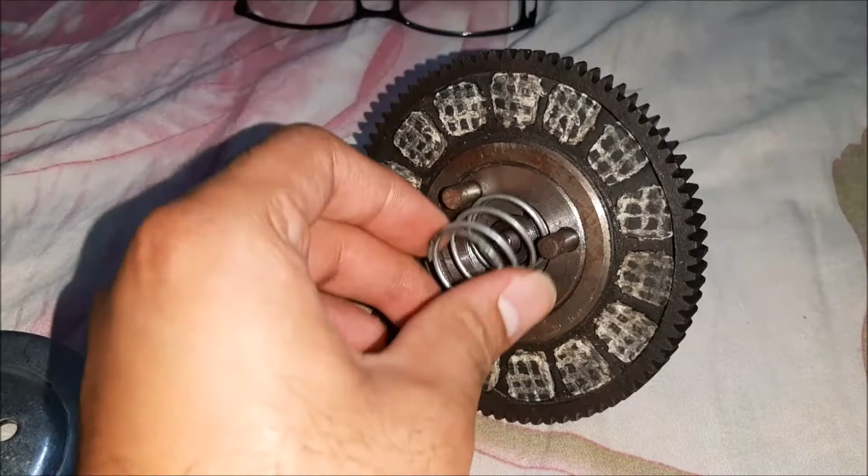So basically what we will do is the spring will go here. Spring will actually go there. And then the clutch base will be mounted onto this.

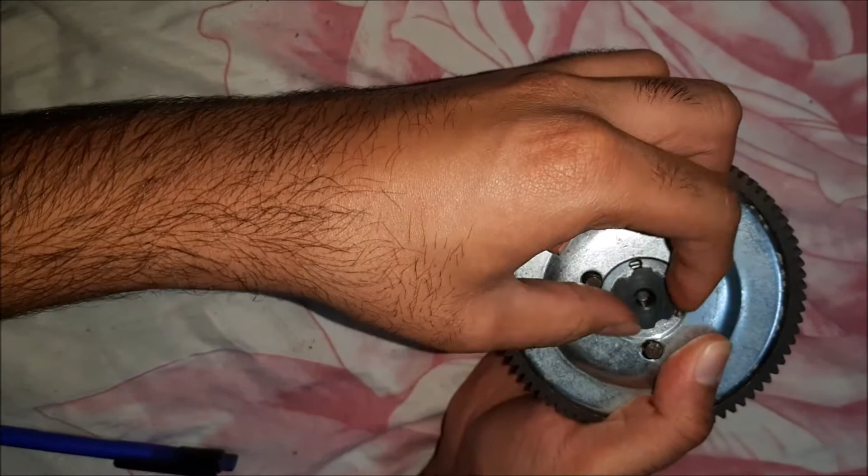So this is where the flower nut will be screwed on. So the spring will go here, and then I'll be having the friction plate which will go up there. So then the flower nut will go here, and the flower nut will be screwed onto that part.

You'll see the flower nut holds the system in place. So as I screw the flower nut, this will exert pressure on the friction plate, and the friction plate will exert force on the bevel gear.

So as you can clearly see here, there is no force. So if my motor turns, my friction plate will not turn. So as I continue to screw the flower nut, you'll see that when I turn the bevel gear, the friction plate will also turn, which will in turn turn my shaft. So a simple way to remember where the bevel gear will be, where the sprocket will be.

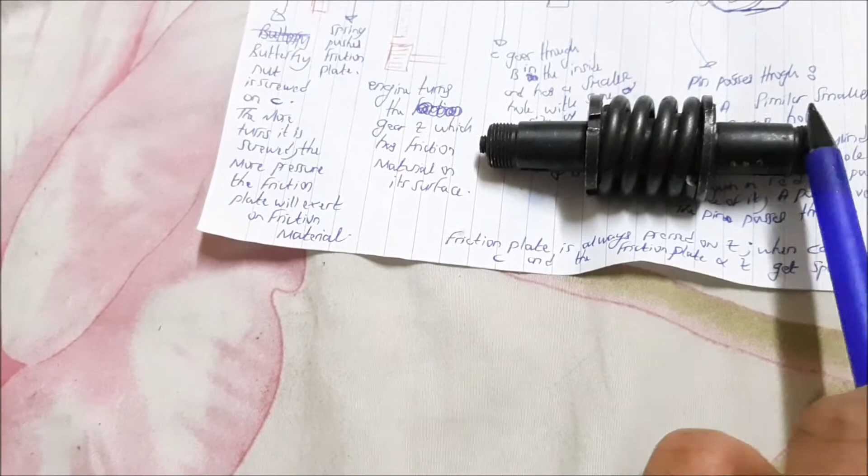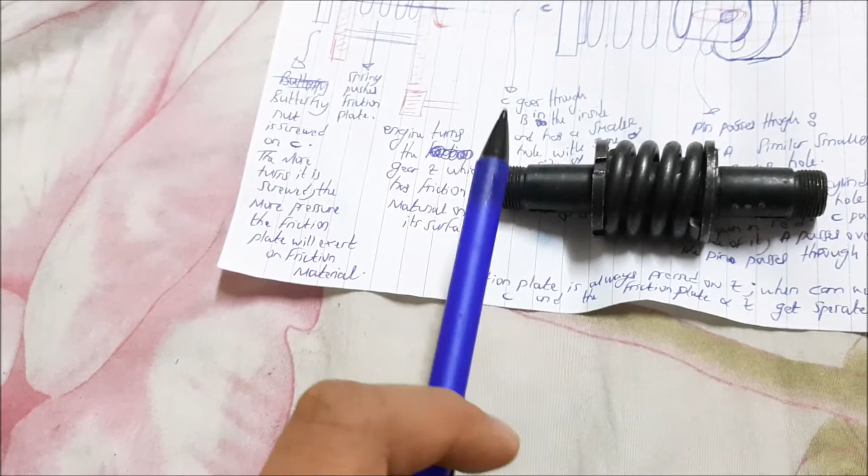So another way to remember this is a way to know where the bevel gear will be. So where the bevel gear will be, this is the place where there will be a flower nut. So as you can clearly see here, you have the protruding threaded end on this side. So where we have the protruding threaded end on this particular side, this is where the flower nut will be screwed on.

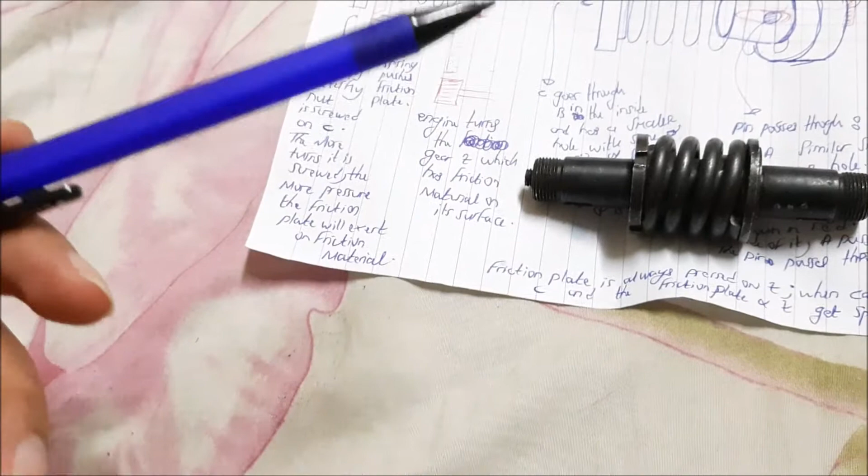So where the flower nut is, this is where the bevel gear will be. So we know where there is a hole, this is where the sprocket is. Where there is a protruding threaded part, this is where the bevel gear, which includes the clutch inner race, this is where they will be found.

So that's it. So another small thing we need to say is that, in fact, the problem is that the more I screw the butterfly nut onto that inner shaft, the more pressure the friction plate will exert on the bevel gear.

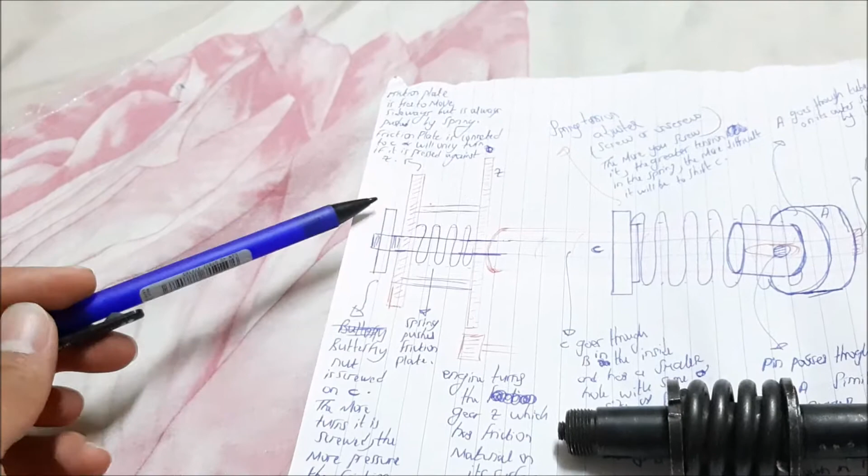But the thing is that if I screw the butterfly nut too much, even when the cam turns and shifts the inner shaft towards the left, the friction plate and the bevel gear will not be completely disengaged. There will still be force acting on the friction plate, so they will not disengage completely. So this is the problem that we can have.

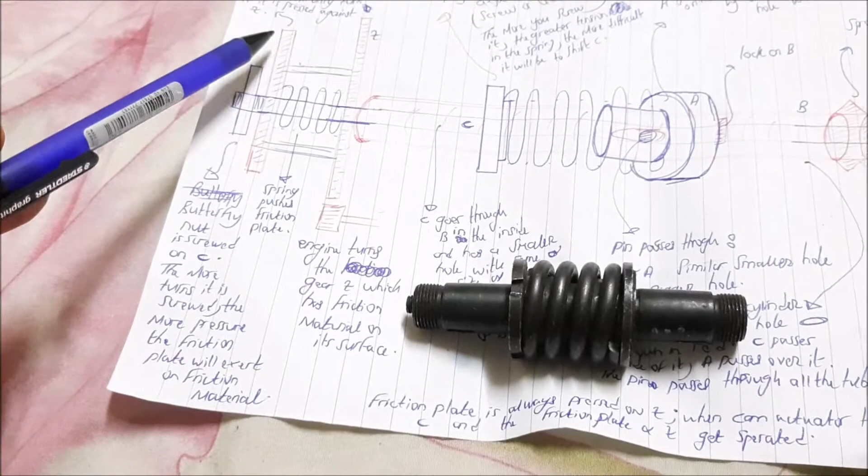It's like when we screw the butterfly nut too much, the thing is that even when we press on the clutch lever, you'll see that they don't disengage.

In another way, if you don't screw the butterfly nut in an appropriate way, there will never be sufficient pressure exerted on the friction plate that will cause it to press on the bevel gear.

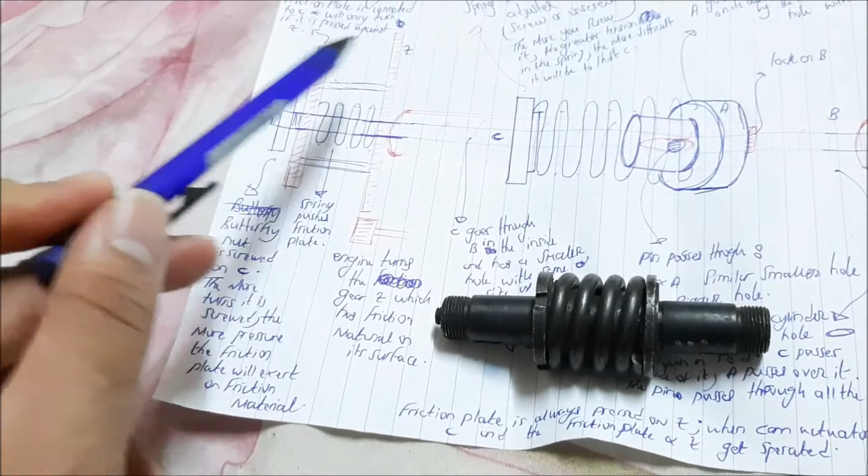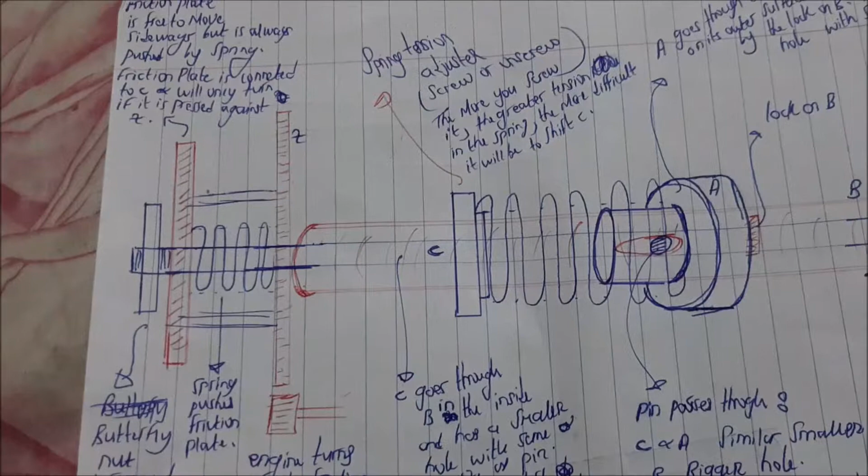So they will never be completely engaged, like firmly stuck together. So this is how you'll see that even when you're not pressing the clutch, the main shaft is not turning. So those are the two main problems.

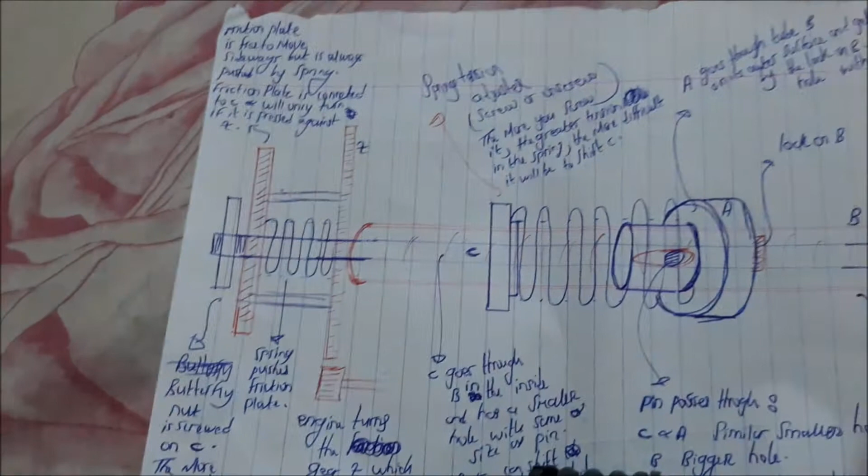So I'm going to repeat it again. If you screw that too much, even when you press the clutch lever, they will not disengage. So what problem we can have is, like, you might be riding your bike and your engine is on, so even when you press the lever, this does not disengage the motor.

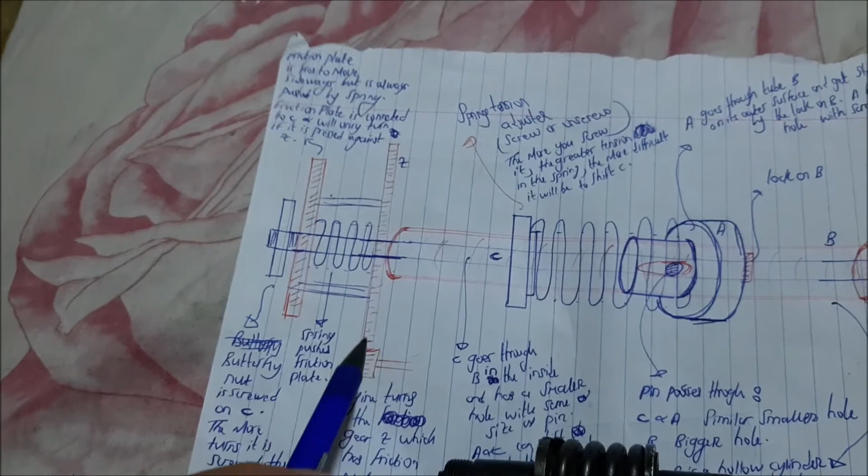Your engine will continue to turn the bevel wheel, which will continue to turn this friction plate as they're pressed together, which will continue to turn the main shaft, which will continue to turn your wheel. So it's like the clutch lever has no effect. Even when the clutch lever is pressed on, you can actually accelerate your bicycle and it will go fast.

Another example is when they are not properly engaged, like this has not been screwed properly. You'll see that even when the lever is not pressed, and even when you're accelerating hard, the engine is turning very quickly, but they are not properly engaged. So the friction plate will not turn, this will not turn your shaft, which will not turn your wheel. So those are the two problems.

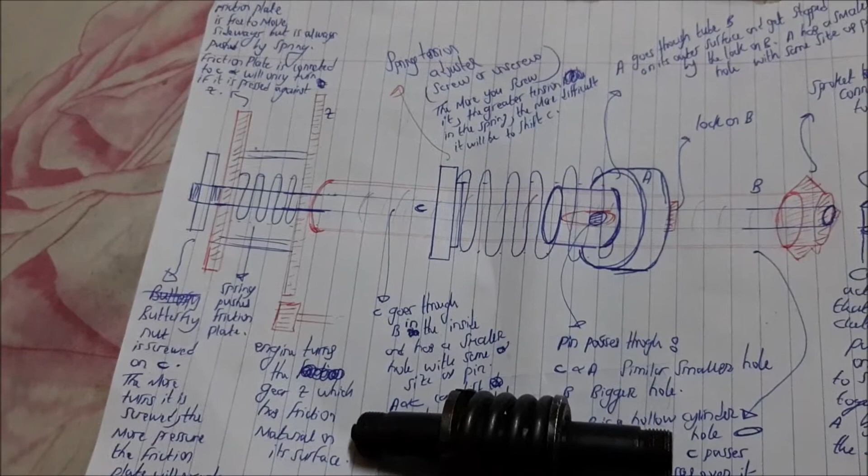So you need to find the right balance. We can test this - you need to find the right balance so that when I press on the lever, it disengages well, with no slipping. And also when I release the clutch lever, there is a good grip when I accelerate, the friction is completely stuck together, there is no slipping.

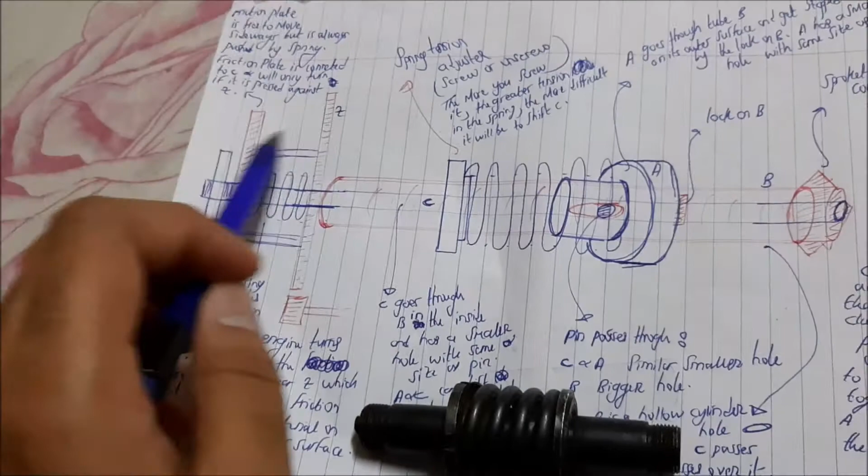So before showing you the actual installation and removal, we'll be going quickly through the different parts of the clutch assembly.

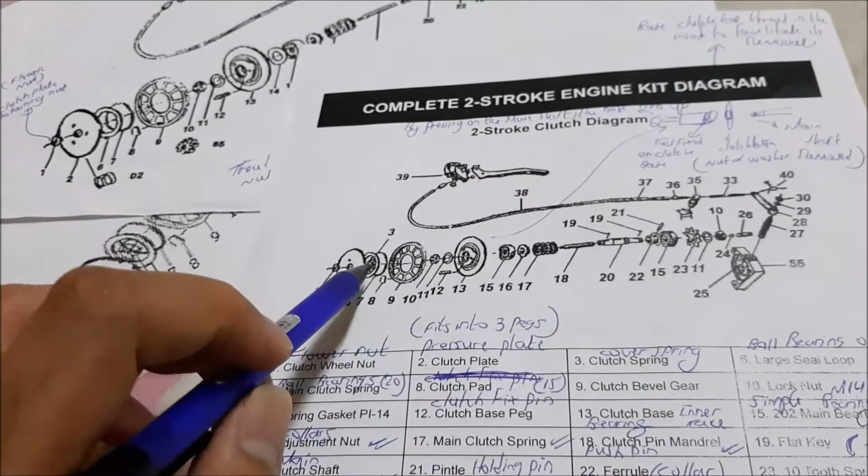This is the clutch wheel nut or the clutch flower nut, as we already said. This is the clutch plate, the clutch friction plate. As I told you, there will be a spring that will be pressing on the clutch friction plate. So when I pressed on the inner shaft, this will lift up, then there will be a small spring that will be pressing onto the friction plate to lift it up.

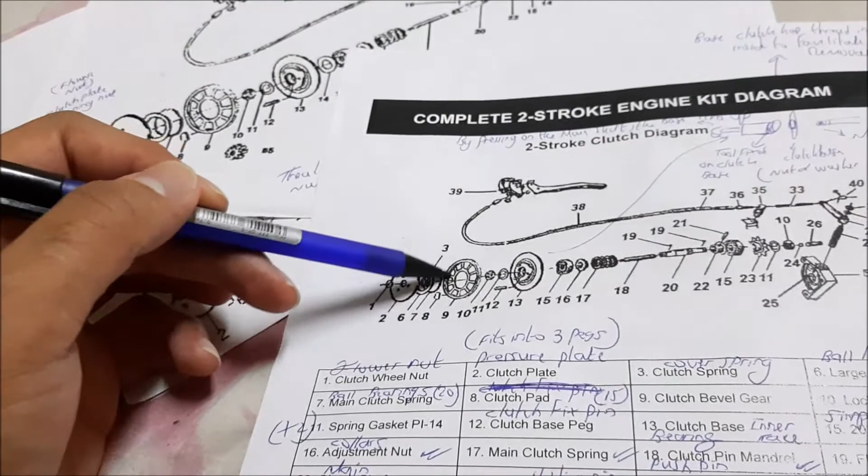Number 3, that's the cover spring. Then I'll be having the assembly of the bevel gear and the clutch in the base. That's the clutch, that's the bevel gear, that's the clutch in a base. And I'll be having the outer race and bearings. That's the inner race. Let's go through it.

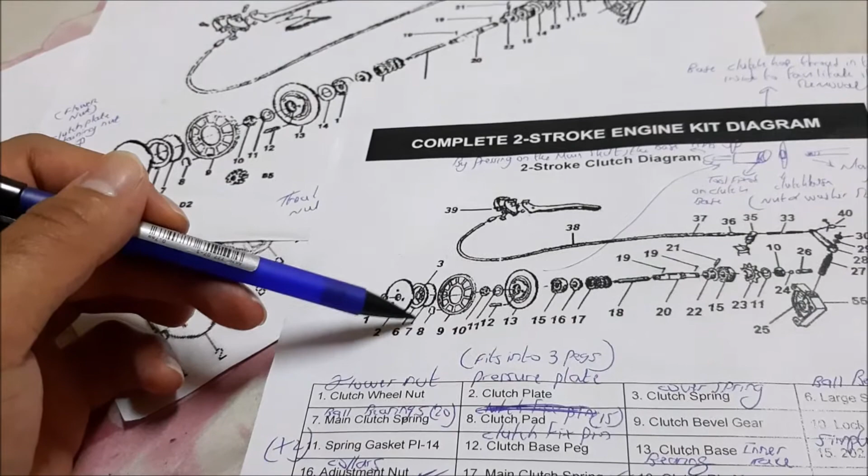Number 6, that's the large seal loop or the outer race. It will fit into that. Number 7, you'll be having the main clutch spring. Those are the ball bearings. This will fit into this, the ball bearings into this.

Then you'll be having number 9, number 8 are clutch pads. As you can clearly see here, those are clutch pads, friction material. Number 9, that's the clutch bevel gear. And as told you here, this will be fitted onto that. All of those are the same, are one piece. This will be fitted onto that.

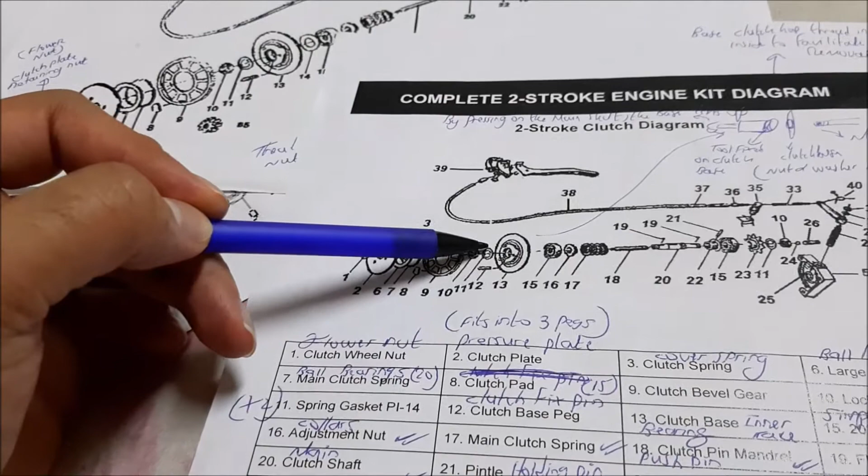I will be needing number 10, which is a lock nut accompanied with a spring gasket. Number 12 is the peg, the clutch base peg. Number 13 is the clutch base, the clutch base or inner bearing race. Then I'll be having 15, which is the main bearing. This bearing is fitted on the main shaft for support.

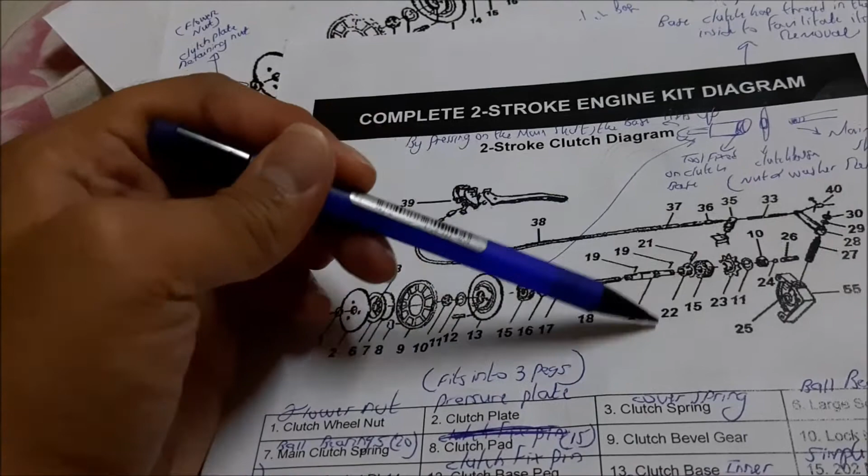As I told you, there will be 2 bearings - 15 here, this bearing, and 15 here. This bearing will be fitted on the main shaft for support. And then 16, as I told you, all of those - this one, this one, this one, this one, this one - all of those are the same piece, because the bearing goes over the main shaft.

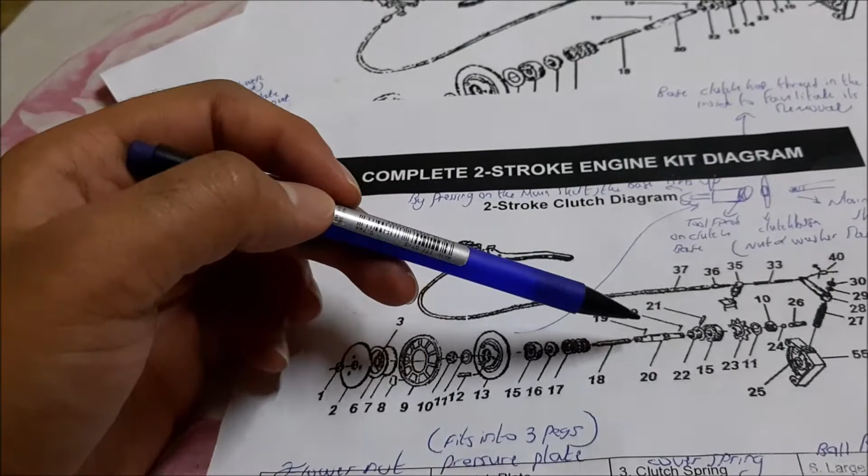Adjustment nut, main clutch spring. That's the clutch pin. That's the flat key, number 19 the flat key. Main clutch shaft, number 21 that's the pin. Number 22, that's the ferrule, the collar. And 15, that's the main bearing.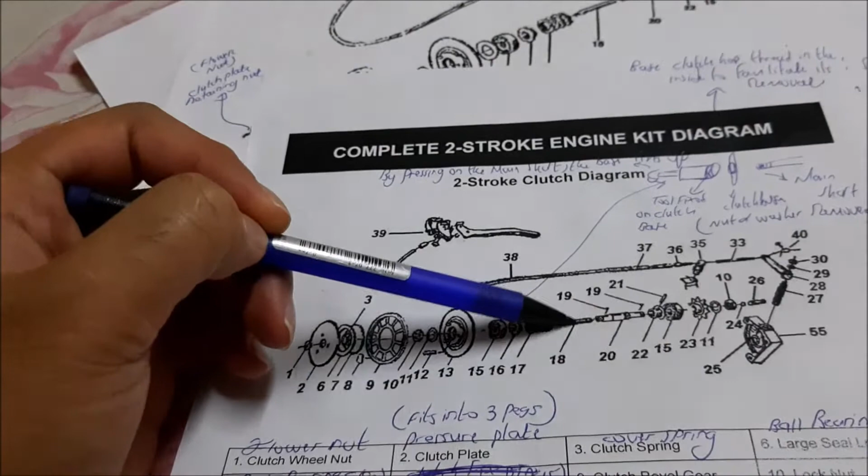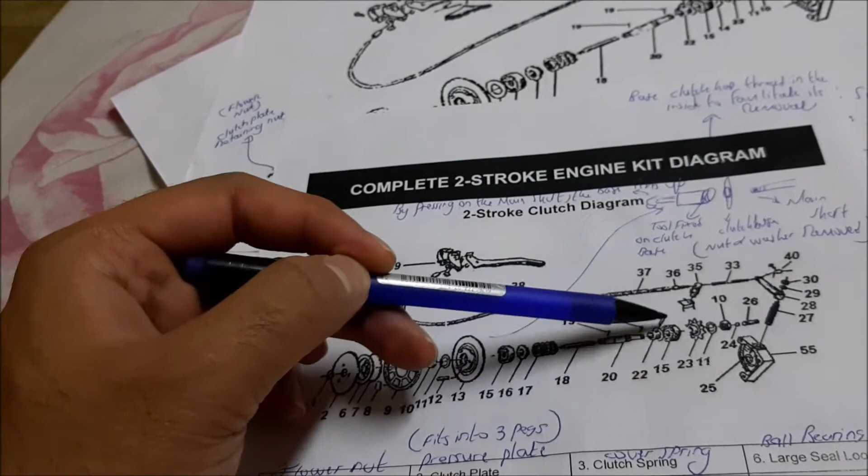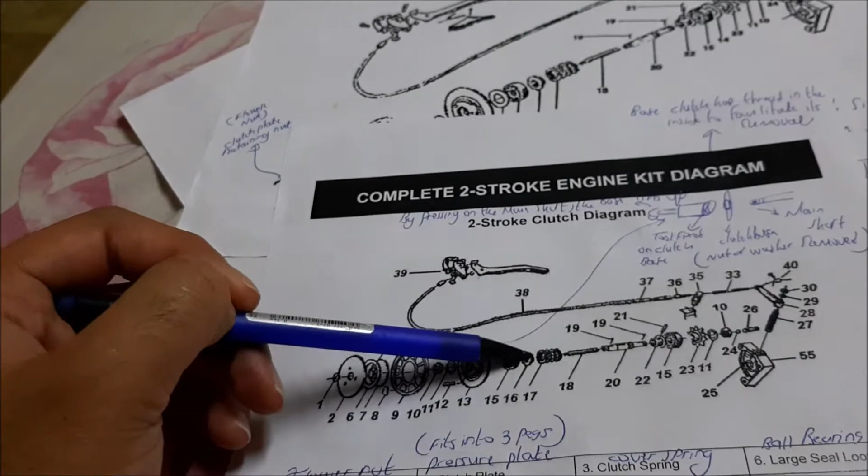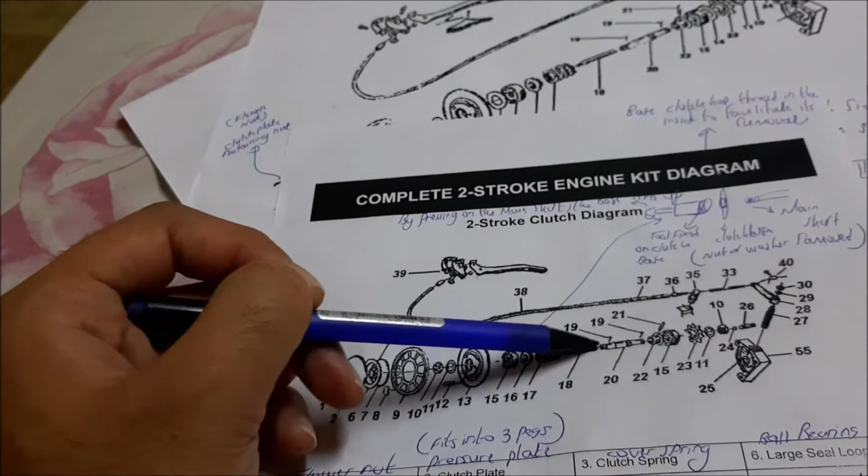As I told you here, we already know how this works. This inner shaft goes into this, and this collar goes over those two. When the inner shaft is into this, the collar goes over those two, and then this pin goes through all of those three - through the collar, through the main shaft, through the inner pin. Then I'll be having that spring which will press on that collar, and then I'll be having this collar or adjustment screw that I will use to compress that spring. As I turn the screw, this will exert a force on the spring, and the spring will exert a force on that collar, and this will shift the main shaft to the right.

And I already know that 23 is the tooth sprocket.

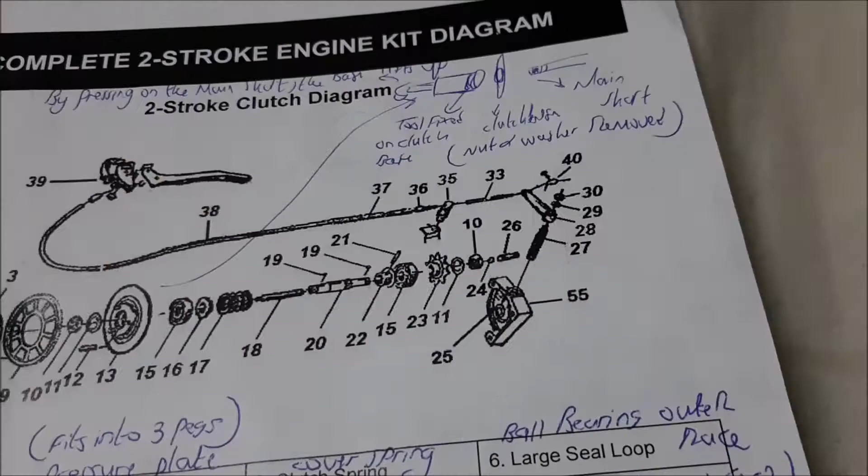So as I told you, similarly here, this is fixed onto that main shaft. So I will need a nut and spring gasket.

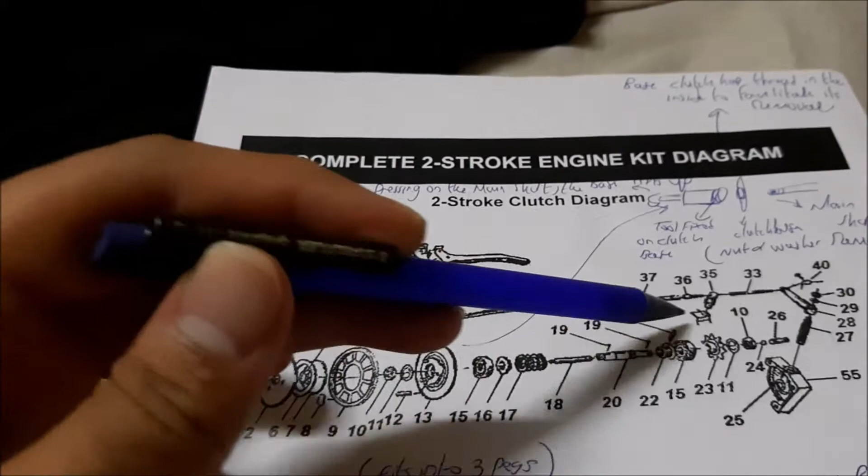Similarly here, as I told you, the sprocket is secured. The sprocket is locked onto that main shaft with the help of a flat key. And to be able to secure the sprocket on the main shaft, I will be needing the M14 nut.

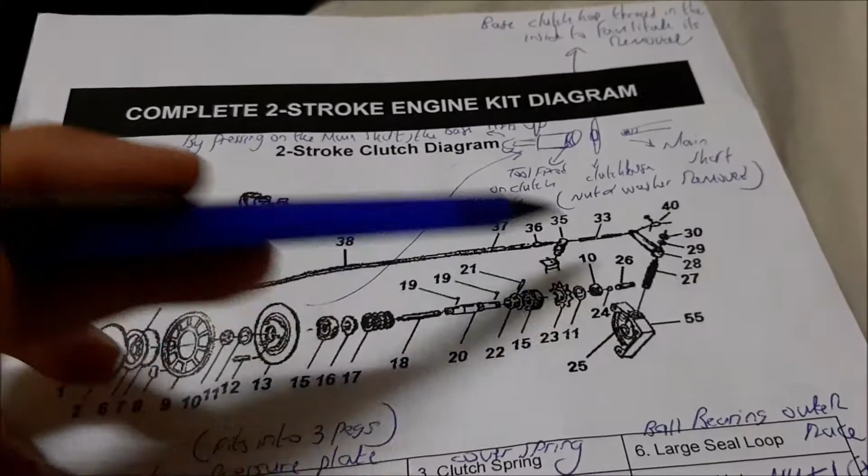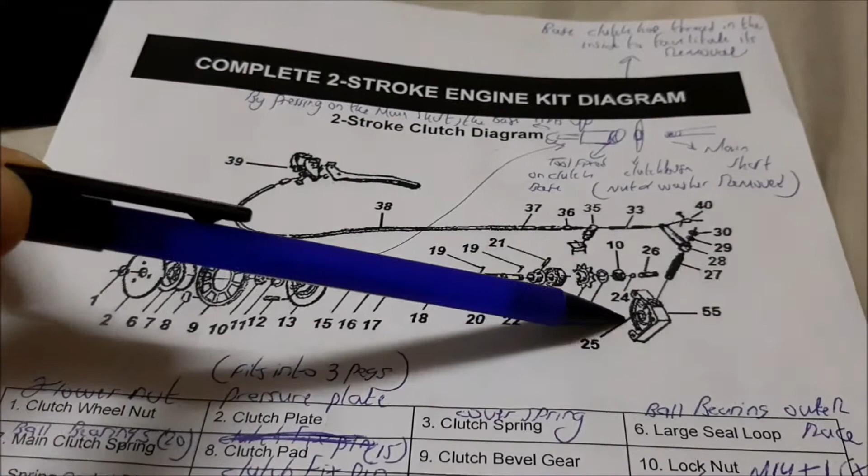Plus the spring gasket, and then 24, this will be the ball bearing or clutch actuator bearing. And 25 is within the lever actuation. So those, we don't care about those. That's the shaft fixed pin, so we don't care about this.

So 26, I'll tell you this is the pushing bar. I'll turn the camshaft, this will press on the ball bearing, which will press on the inner shaft, and so on and so forth. So those are the different parts.

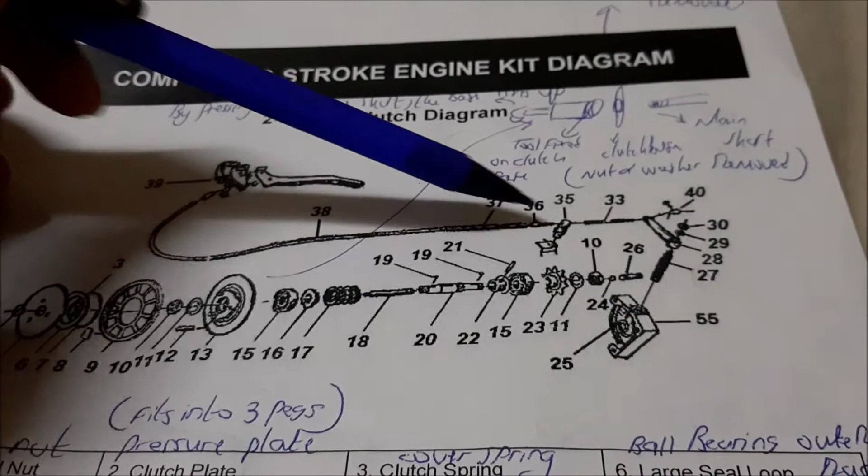I'll be having the camshaft that will enter here. So those are the lever actuator and so on. For example here, this is clutch screw base. I'll be having like heat shield spring and so on, clutch cable, this is clutch lever and so on. So those are the simple stuffs.

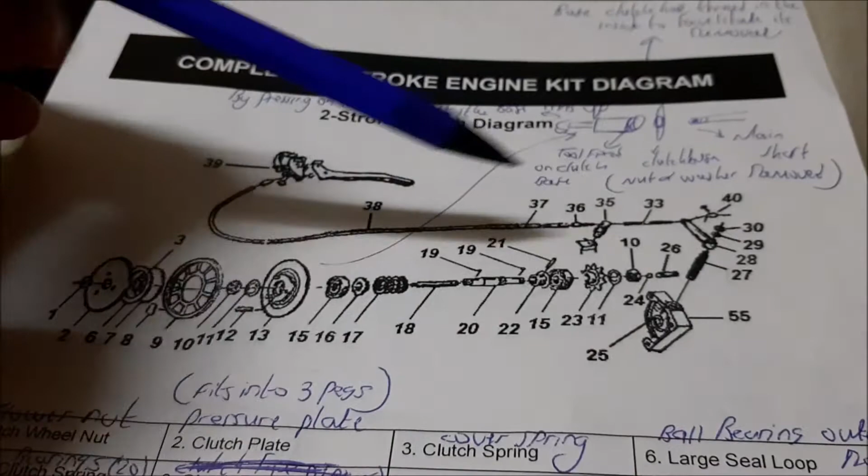But here it is, so that's all that we have. And that's a complete two-stroke engine kit diagram, the clutch diagram in fact. So that's it.

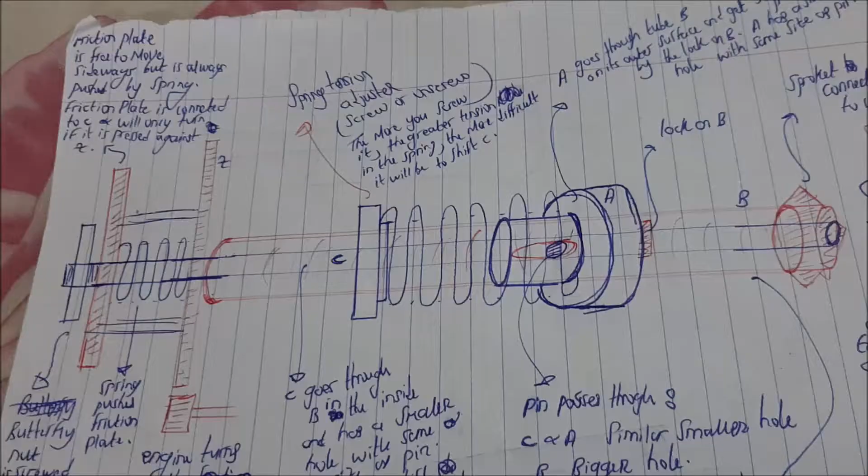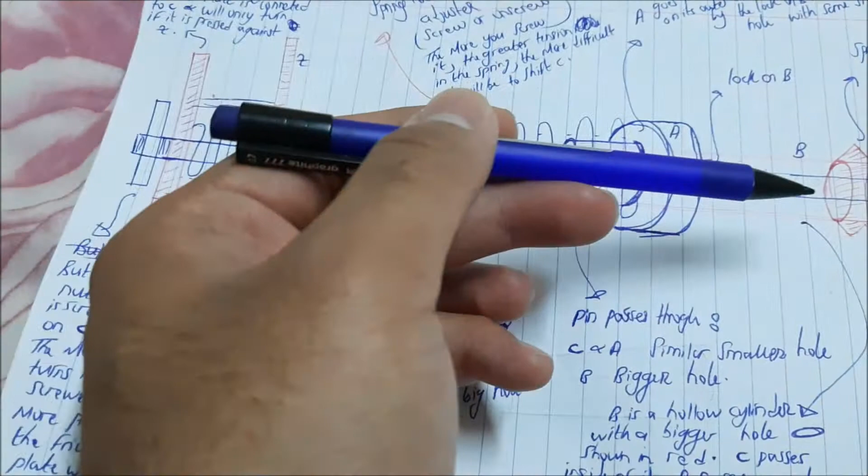So I'm gonna explain a small thing before we proceed to the removal and installation of the clutch assembly. We need to bear in mind that this spring is actually exerting force on the inner shaft in this direction, constantly applying a force on the inner shaft.

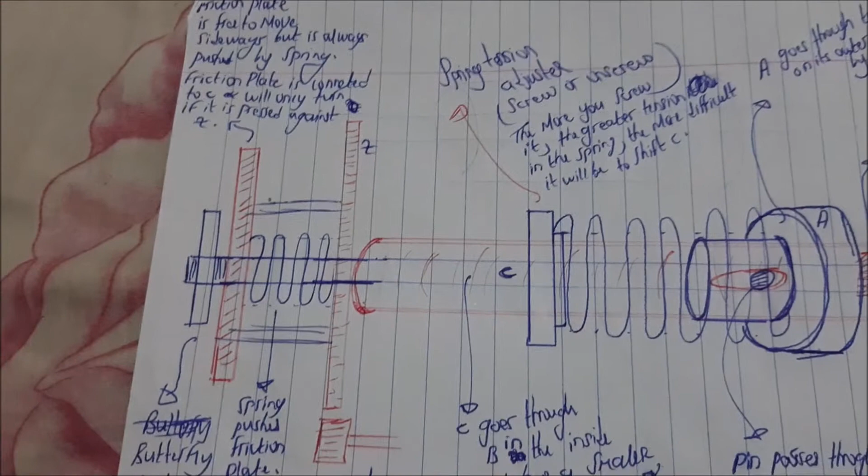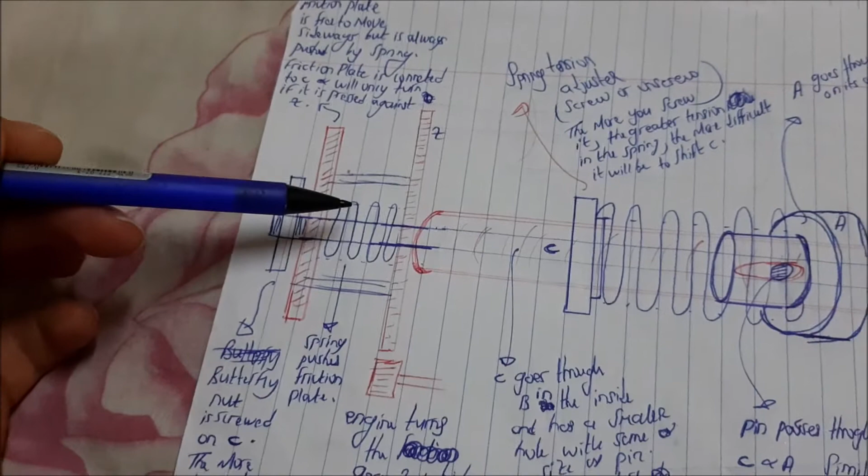So when I actually screw the flower nut onto the inner shaft, as we have a spring here, and I will show it how it is in real, as the friction plates are a little bit at a higher position than the thread.

In fact, this is only a representation. The thread is not that long here, it's a little bit shorter here. So as the friction plate is at a higher position compared to the thread, I'm not showing this here.

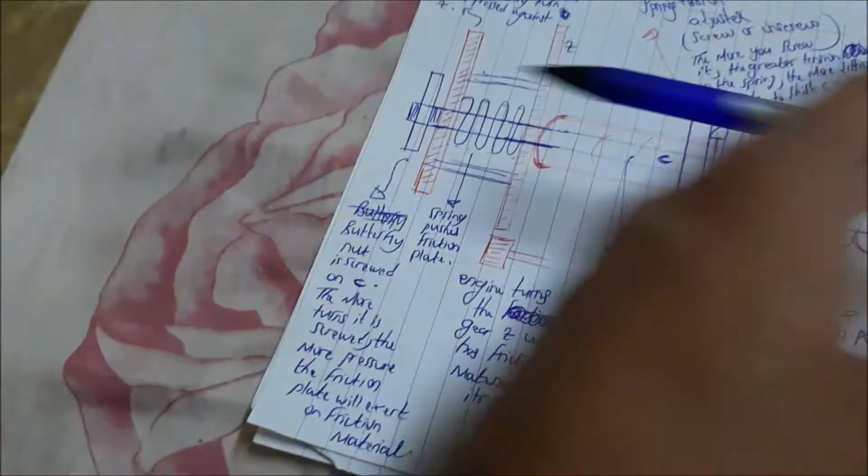So when I put my flower nut, this will definitely have a tendency to apply an opposing force in this direction. And if I screw the flower nut too much, or continue to screw it, there will be more force acting in this direction on the inner shaft.

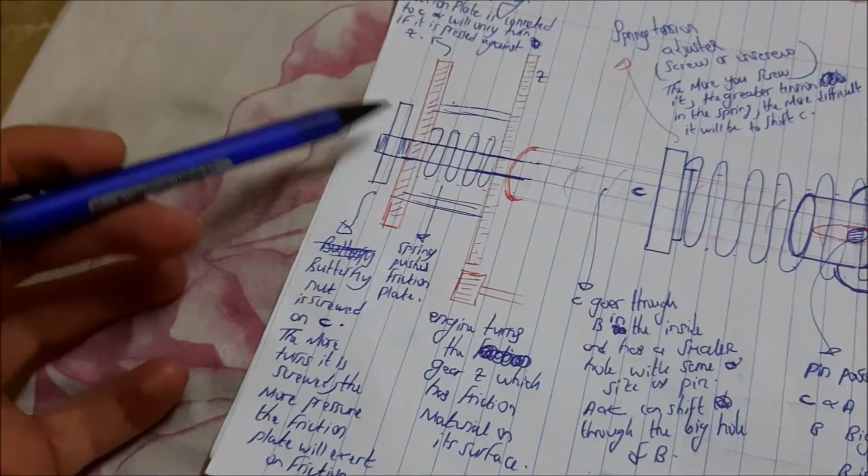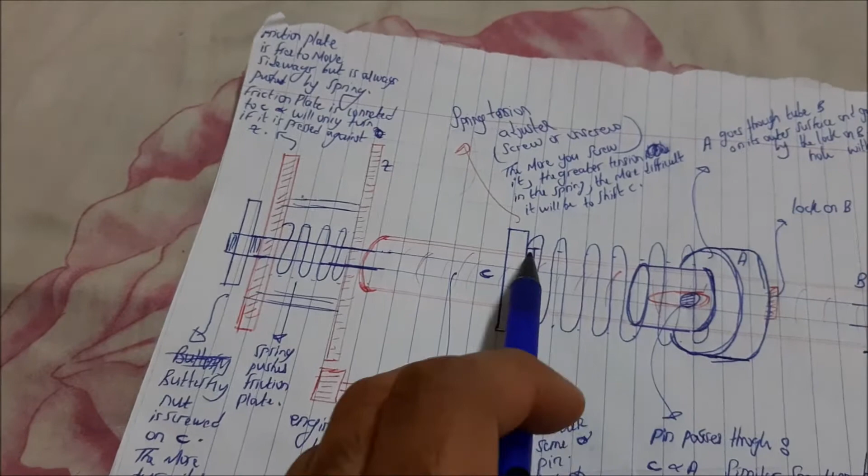So for example, if I screw it again and again, this might have the effect of compressing the spring here. So all of the system works, that's a single system, they all work together. That's only a small thing I wanted to say, but the spring might not be compressed, it all depends on the force of that spring.

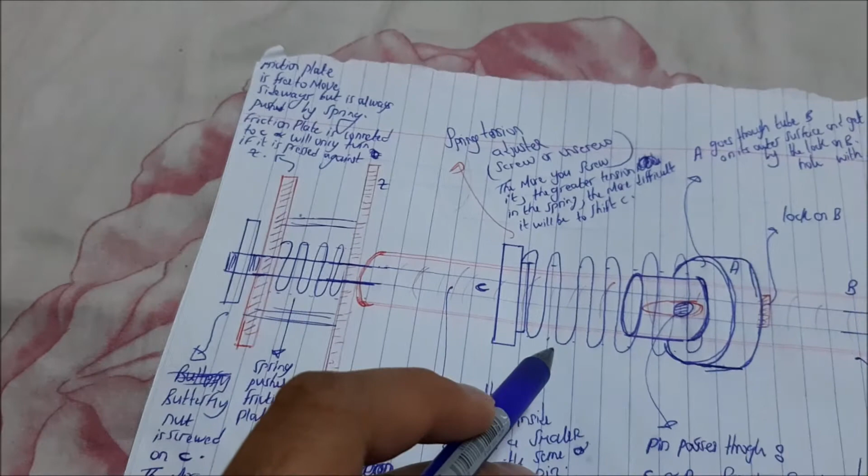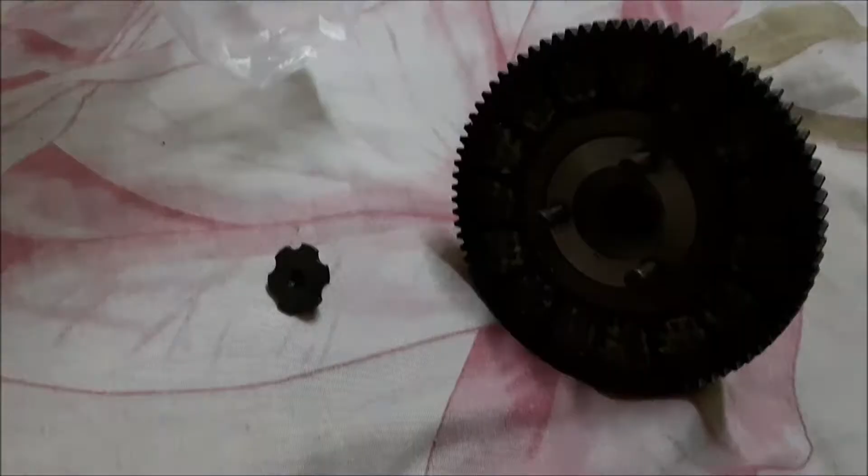So when I'm actually putting the flower nut, it is eventually exerting an opposing force in this direction, but this might not be enough to compress the spring. So that's the small thing that I wanted to say and explain.

I will show you. For example, if I place the friction plate onto the bevel gear, you can clearly see that the flower nut can easily reach the threaded part which is there. That's a simple logic, and a simple way to understand it.

It might not be like this in detail, I will explain to you afterwards. But this is definitely simple: when you screw on the flower nut, this will exert more pressure on the friction plate, which will exert more pressure on the friction material found on the bevel gear.

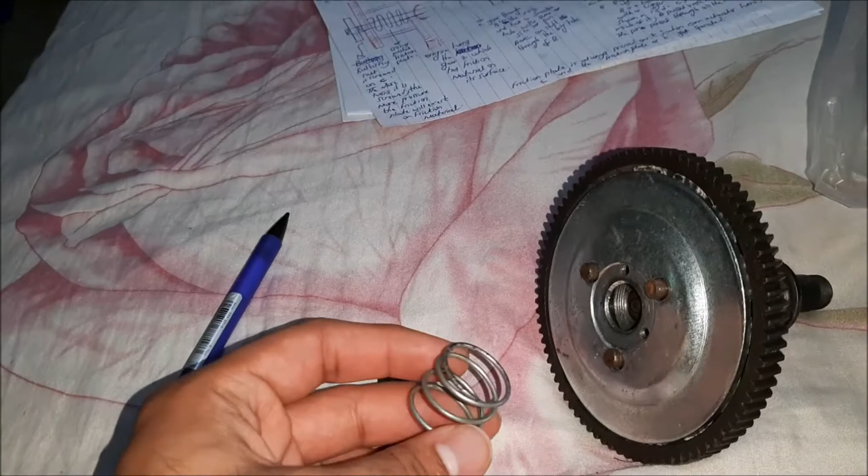So that's one thing. The second thing I wanted to show you is that, for example, if I take that spring and place it in between the friction plate and the bevel gear, so this doesn't want to come off.

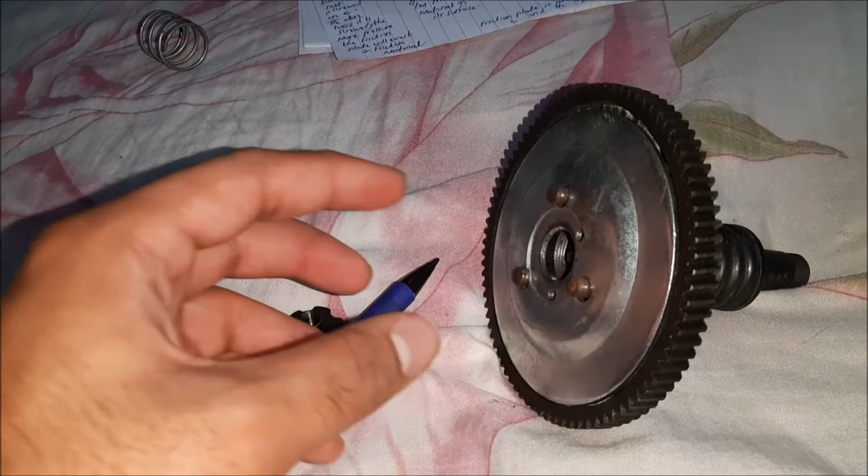So when I place the spring here and the friction plate here, you'll notice there's a problem getting the flower nut to reach the threaded part on the inner shaft. So I will need to press on that to compress the spring so that the flower nut can reach the threaded part. Definitely you need to understand that.

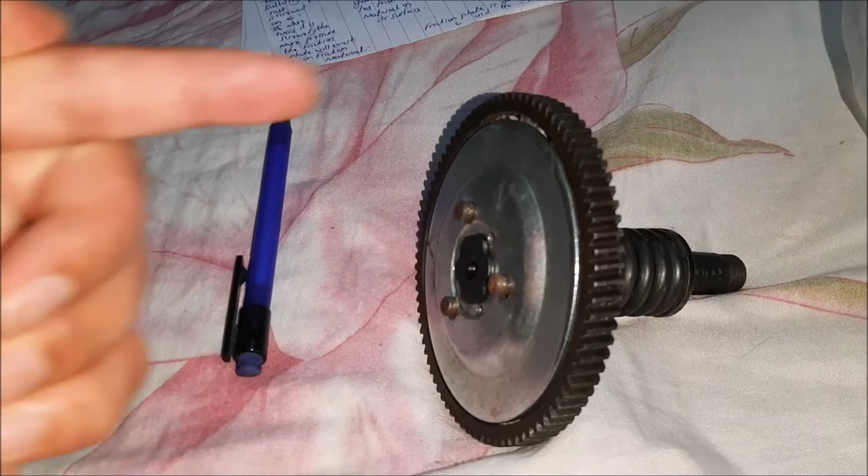My spring, which is found here, exerts a force on the inner shaft in this direction. And this spring is exerting a force in this direction on the friction plate. As the flower nut rests on the friction plate, this will exert a force on the flower nut, which is connected to the inner shaft. So this will exert a force on the inner shaft in this direction. That's what I wanted to tell you.

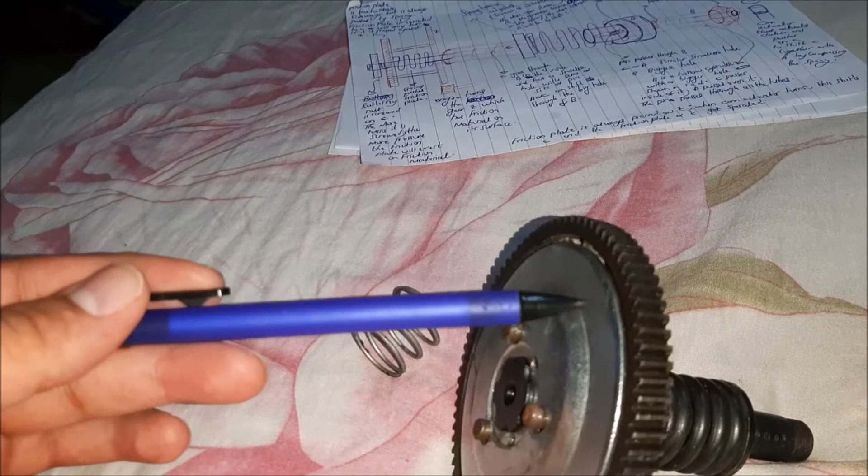Another thing I want to explain is that the spring has a direct relationship with the force which acts on the friction plate, which acts on the friction material found in the bevel gear.

So what I'm going to explain is that when this spring is fitted between the friction plate and the friction material, and I've already screwed on the flower nut, the spring is already compressed completely. The friction plate actually rests on the friction material found on the bevel gear, so there is no space in between. You need to understand that there is no space in between. It is already pressed on the friction material found on the bevel gear.

So when I screw on the flower nut, it will not cover any empty spaces, since there are no empty spaces between those two components. So when I screw on the flower nut, this will have the tendency to bring the inner shaft to the left position, in this direction. Definitely when I screw on the flower nut, this will have the tendency to shift the shaft to the left position, and this will have the tendency to compress my spring.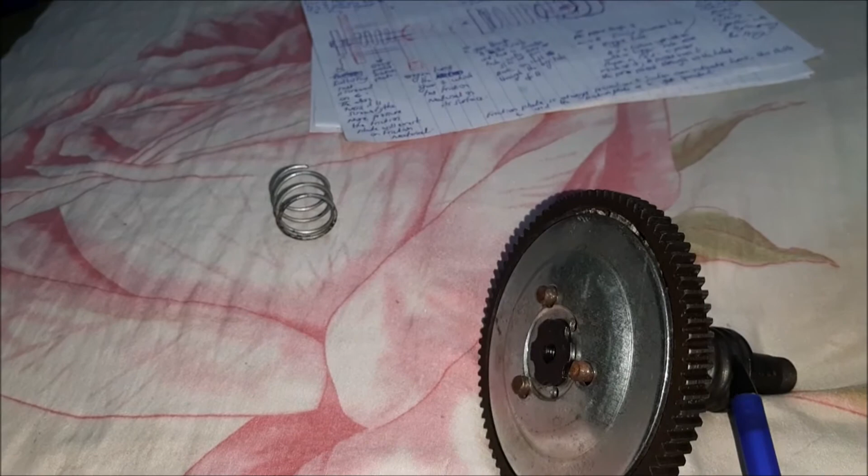So the thing that actually occurs is that when you are screwing the flower nut, the inner shaft gets shifted towards this position, because the friction plate is already seated, already fits perfectly on the friction material. So as you screw, this will have the tendency to bring the inner shaft in this direction. This will have the tendency to compress the spring, and this will have the tendency to apply more pressure on the friction plate, which applies more pressure on the friction material found on the bevel gear.

So that's the relationship between the spring and the flower nut. The spring has a direct relationship with the force which acts on the friction plate, which acts on the friction material. So when the friction plate already fits on the friction material, under this condition, when you screw the flower nut, this will definitely compress the spring. The more you compress the spring, the more the inner shaft is shifted towards the left, the more pressure exerts on the friction plate, which acts on the friction material.

So then, for example, at this point, the system is balanced. There is no resultant force. During the screwing motion, there is some resultant force because the spring is compressed and the shaft shifts in this direction. But afterwards, that's just the balance point. There is a force which acts in this direction, and that's it.

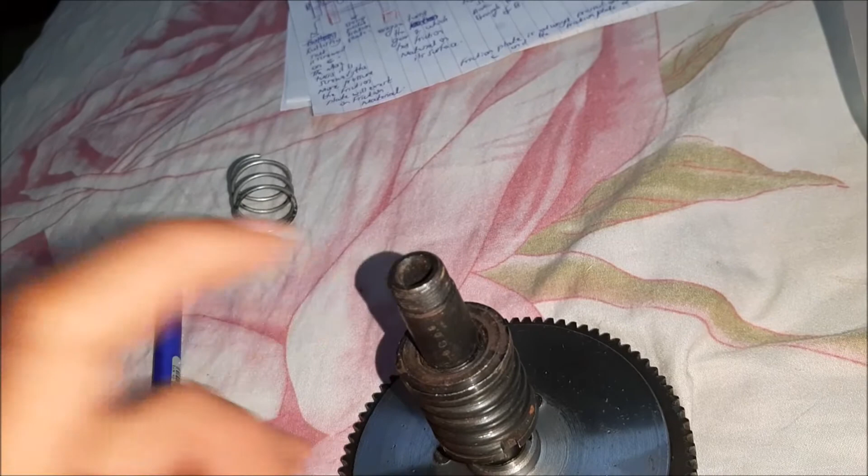So that's it. So all of the system, they all work together. The spring is completely related to the force which acts on the friction plate. So that was the thing I wanted to say.

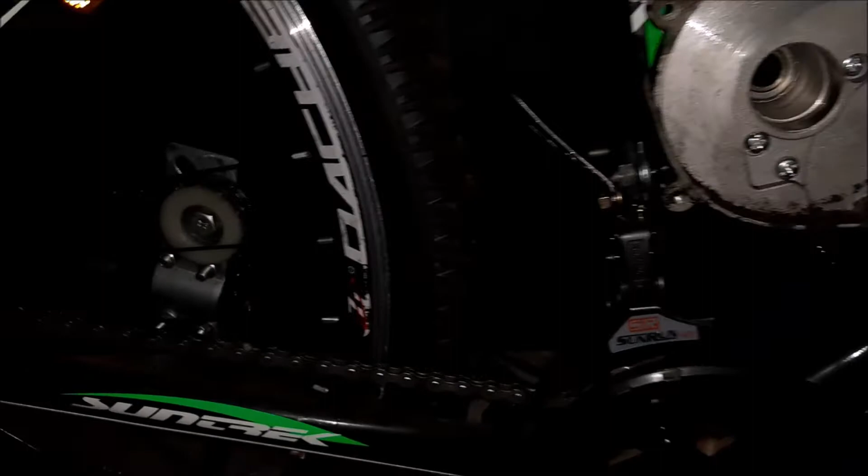So we'll now proceed to the removal and installation of the clutch assembly on the bicycle. I will be showing the removal and installation of the clutch assembly. In fact, it is already removed, but don't worry, I will show you the essential steps in removing and installing the clutch assembly, so that you don't make mistakes and so on.

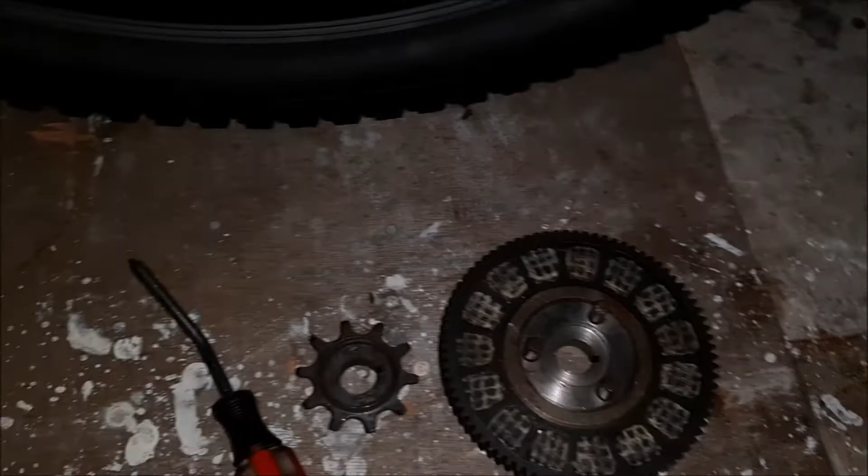First of all, I'll be completing the easy thing of screwing or unscrewing either the sprocket or the bevel gear. So I already explained how to actually remove either this bevel gear or this sprocket, but we will go through this very quickly, and after this I will show you the essential step when removing the clutch assembly so that you don't make any mistakes, so that it is very easy.

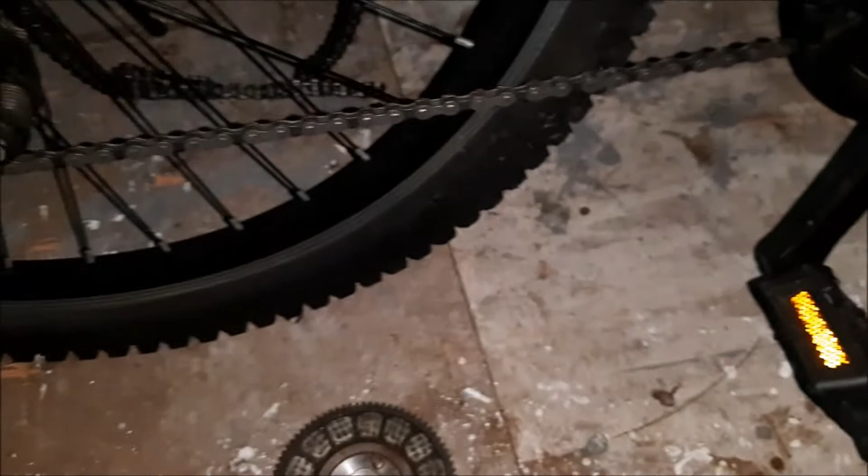So let's do it. There will be no steps here, just simply a screwing and unscrewing thing. As you already know, I will have the bevel gear, I will have the main shaft which goes in there, and as you can clearly see here, I have this bearing, I have two bearing supports. You can clearly see the other bearing support which is inside, and I will be having another bearing here. So definitely this is the bevel gear.

The bevel gear will be locked onto the main shaft by the use of a flat key. This is the place where we put the flat key. So the bevel gear will actually be locked on the main shaft, and then this goes here. And then to secure this in place, I'll use a bolt and a washer. I will be screwing it here.

So first of all, I'm not doing the steps, I'm reminding you, I'm not doing the steps. I'm only showing you the screwing and unscrewing process. So that's all.

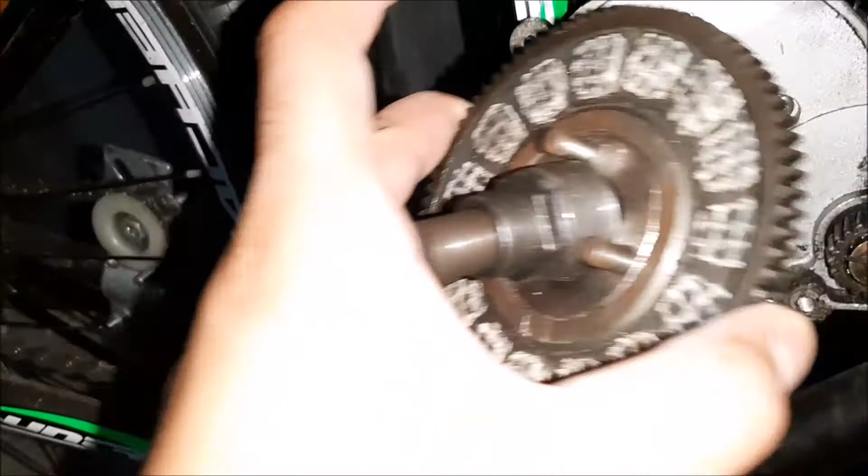To be able to remove this, it is very simple. I will firstly need to remove that M14 nut and washer. So you take the M14 nut and washer, you remove it. And then, as I already said, you'll be using the tool. You'll be screwing the tool over here, and then you'll be screwing that bolt. When you screw that bolt, this will help you, this will go out, so then you'll be able to remove this out. So you will take this out. This is simply a screwing and unscrewing process.

I will do the same thing for this sprocket, and then we will do the essential step when doing this screwing and unscrewing process.

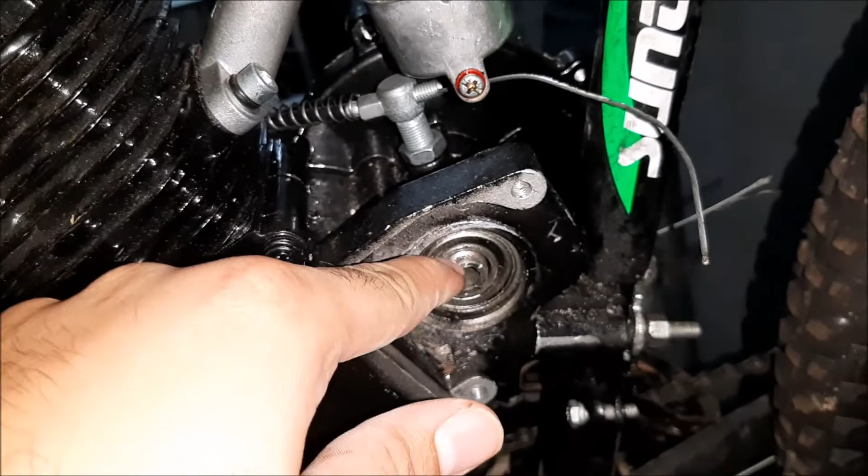So that's the other side of the bicycle. As you can clearly see here, you will be able to see the gear which is here, the support gear which is the support bearing, which is here. Definitely the main shaft goes in here. So for now I need to hit on the other side so that the main shaft goes completely in here, so you will not be able to see that the small race for the flat key.

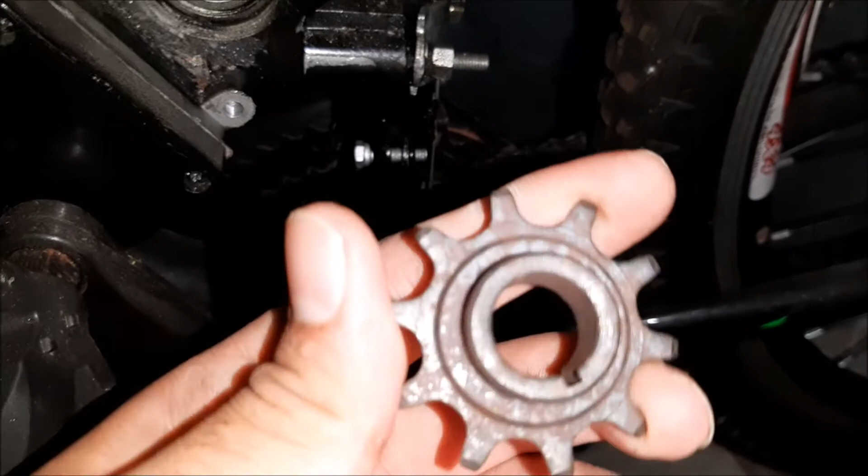So don't worry about that. Similarly, my sprocket will be here. My sprocket will be locked onto the main shaft by use of the flat key. Note that this thread on the main shaft, as you can clearly see here, this thread here on the main shaft - note that this sprocket is not screwed on the main shaft. Remember that. The sprocket is locked on the main shaft by the use of a flat key.

The flat key goes in here. So the sprocket goes onto the main shaft, slides onto the main shaft, and is locked on the main shaft by the use of a flat key. And then similarly, like on the other side, this thread is used to secure the sprocket by the use of a nut, an M14 nut and washer.

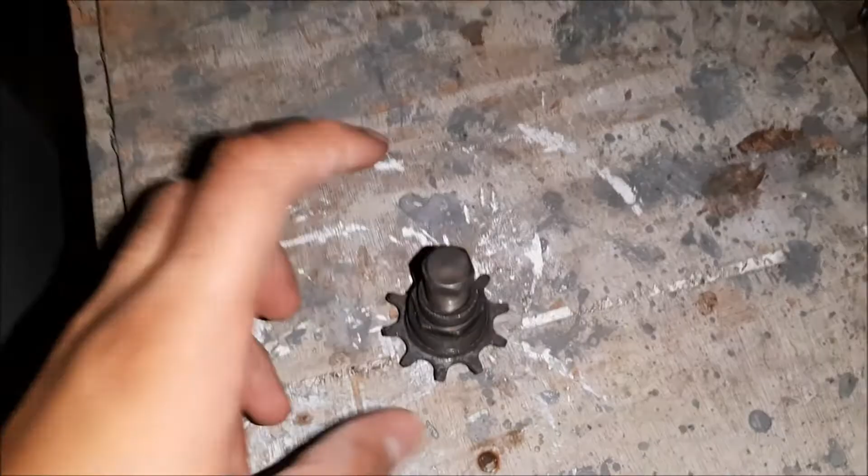So if you're going to remove the sprocket first, you will firstly need to unscrew that M14 nut and washer. When you have already unscrewed that M14 nut and washer, then you need to do the same thing. You need to take that tool and screw it on here. So it will be definitely like this here. So the sprocket will be here. You will take that tool and then you will screw that bolt. So this will help you to kind of remove this sprocket.

So those are simply a screwing and unscrewing process, but we need to go through the steps when doing this to be able to do it without mistakes or for it to be not difficult. So let's go through this now.